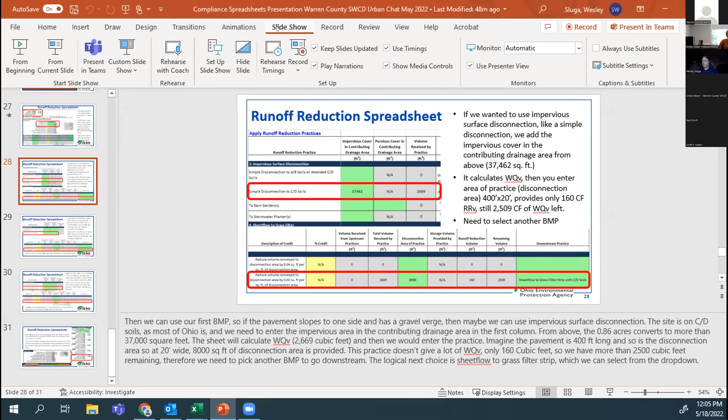I'm going to talk about the Ohio EPA compliance tools and spreadsheets that we've got available for anyone, external, that might be designers, engineers, developers, or our MS4 partners, to help. These worksheets are designed to help the review side of project compliance with our construction stormwater general permit, and they're not really design tools, they're much more compliance tools. I'll talk a little bit more about that in a minute.

One of our big pushes is that we've got a lot of different design guidance and requirements in our rainwater and land development manual, but it can be hard to piece all of that information out. So we put these tools together to have a concise location where you can check specific things to make sure your designs are all in compliance, or the designs submitted to you are compliant. It's a great way to facilitate communication between an engineering designer and the reviewer, which might be the MS4 in Warren County's case.

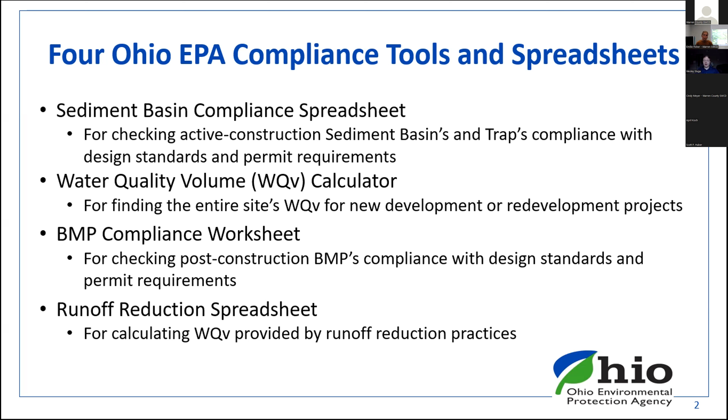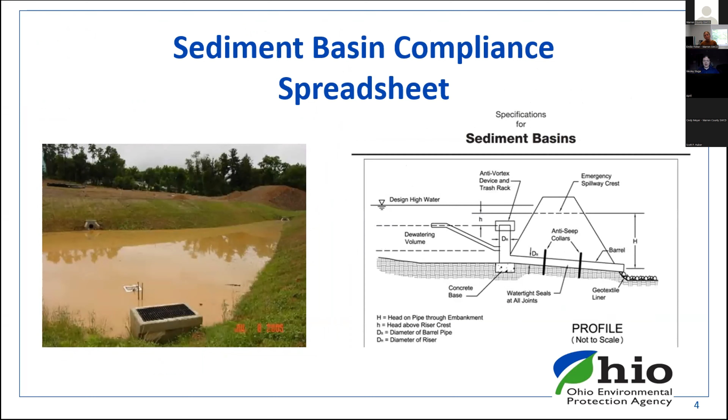The first one is a portion of the sediment basin sizing tool has to deal with skimmer selection and sizing, and most skimmers tend to be proprietary devices. So I want to clarify that the Ohio EPA doesn't require or recommend a specific type or brand of skimmer to be used. And simply because a skimmer is included in this tool is not an inherent endorsement or approval of that device.

Each skimmer needs to be designed specifically for the basin that it's being used for, because the outlet that's provided in the basin needs to meet the requirements of the permit. And that's pretty much to dewater from the surface at a required drawdown rate. And almost any skimmer can do that if designed properly.

I've also got some basic instructions. For example, we want one of these to be completed per basin. And then we want you to put it in the SWP3. So for each basin that you've got, you put one in the SWP3. Really, the only thing that needs to be put in is the basin sizing and dewatering tool tab. The introduction and regulatory guidance tab isn't going to provide a lot for a reviewer.

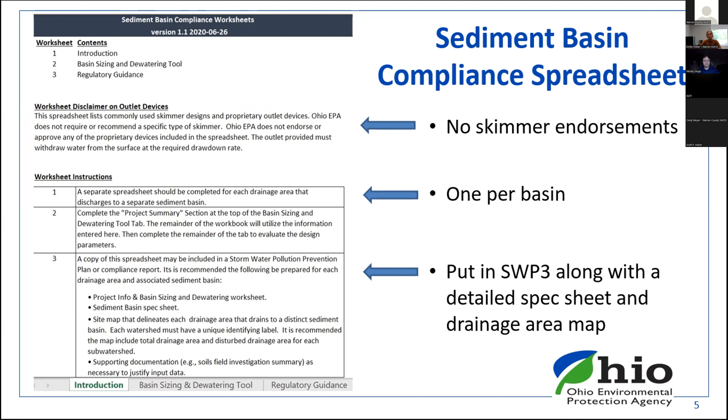Additionally, on the introduction tab, I'll keep reminding that these are compliance check tools to aid designers and reviewers. They're not a design tool, so they don't account for local peak discharge or flood control regulations or embankment design to ensure you've got a stable bank if you're using a basin or something.

So if you find something that is amiss, every one of these worksheets is going to have some contacts that you can reach out to. So you can see my name and my email there, as well as Justin Reinhart, the other engineer that I work with, his contact.

And then we've got a quick cell key that are color coded, and it's going to apply to all four of the tools that I cover today. The green cells are our data entry cells. So those are the only cells that are unlocked that the user can manipulate and interact with. All the other cells are locked to prevent editing or moving or kind of messing up the calculators.

Those yellow cells are constant value cells. For example, equation coefficients will be marked in yellow. While our gray cells are calculation cells, that's where our equations compute the different results based on the entries that you put into those green cells.

And then lastly, we've got our red hashed cells. And those are our design check cells. Those are going to indicate whether or not your inputs result in meeting the design criteria. And they're either going to display a great big okay or a not met. And that'll tell you if you need to go back and try something again, redesign it, or if you're good to move on.

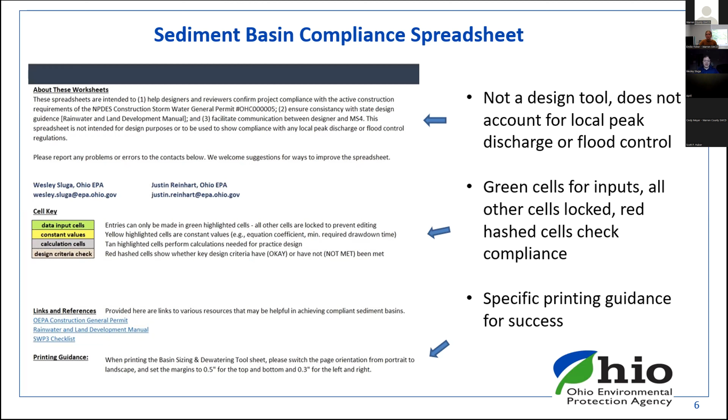And then lastly, at the bottom, we got some printing guidance. And this was an example of community feedback, which I really appreciated. The original format of the spreadsheet didn't really fit onto pages very nicely, but because I got some feedback on it, I was able to change the page orientation. You need to make it landscape mode. You restrict your margins, and this will neatly print off into a PDF, or you can print it off so that you can use it for your reviews.

Now, the basin sizing and dewatering tool tab, this is the bulk. This is where the action happens. And the first step is always going to be to fill out your project summary. I can't stress enough the importance of selecting the correct watershed and properly entering the total and disturbed areas for the drainage areas for these basins, because the rest of the spreadsheet is going to build off of that information. So you want to double check that you're starting out right, and you've calculated your drainage areas properly.

A drainage area is a product of land features and topography. It doesn't end at the site boundary. So you've always got to check for off-site run-on. And the watershed selection, I'll just note that's important because there's a special watershed in central Ohio, the Big Darby Creek, and it has special different volumetric requirements. But if you're anywhere outside of that watershed in the rest of the state, then you'll just use the standard statewide drop down.

Now you can see that on the right-hand side, there's strings of black text that extend to the right of many of the cells. This is guidance text, and it helps to indicate what format we might want entries in the green cells. It might give you an example of what calculation is being done in the gray cells, and then any requirements that are being checked in those red hashed cells.

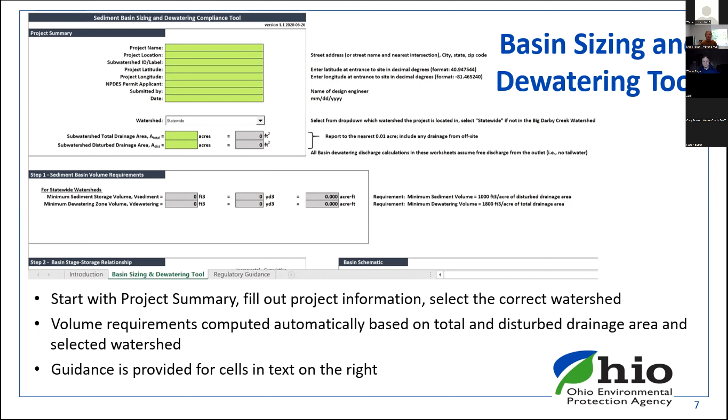So when you get into step 2, that is where your eyes might naturally be drawn over to our pretty awesome basin schematic that helps visualize the information that you provide in these steps. But the important part are step 2 and step 3, which is where you enter your stage storage table and your outlet elevations. I need to emphasize that it's vitally important that the exact skimmer outlet or stop elevations and secondary outlet elevations from step 3, those also need to appear in the stage storage table.

Because if they're not in there, then the spreadsheet isn't able to compute the provided volumes and is not going to give you that sought after okay in the compliance check cells. So if you're getting an NA or a not okay message, that's the first thing that you need to check, is to make sure that those elevations are replicated in the stage storage table.

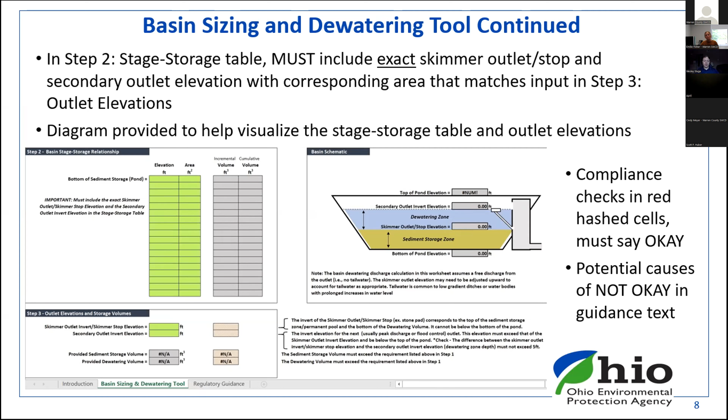But another example might be that your secondary outlet invert is so high that the depth of the dewatering zone, that's that blue section in the basin schematic, maybe that's more than 5 feet, and that is a maximum from our rainwater and land development manuals. That might be another reason why you might get the not okay readout.

Now, step 4 of the spreadsheet is the skimmer selection and sizing process. So the first thing is going to be to select which skimmer is going to be used. The options are listed there in alphabetical order. So if you, for example, select the Delaware DOT skimmer, then a built-in calculator is going to appear below, and I'll show you that on the next slide. But if another option is selected, like the ESC, the Faircloth, or the Marley float skimmers, then the spreadsheet is going to direct you to a link that takes you to the calculator that's provided by the manufacturer.

Now, I'll note that if you're checking or you're filling this information out, check whether you're using the required or provided dewatering volume when using those online manufacturer calculators. Some of them seem to suggest you should use the provided dewatering volume, but you really should be using the required dewatering volume.

And lastly, the last section is to input the orifice diameter size, and that's a little different than the skimmer size itself. So very often the calculator or the manufacturer calculators might spit out that you need a 4-inch X brand skimmer with a 3.2-inch diameter orifice. So this is where we want you to put that 3.2-inch diameter orifice, because that's the restricting or the control orifice, not the 4-inch skimmer pipe itself.

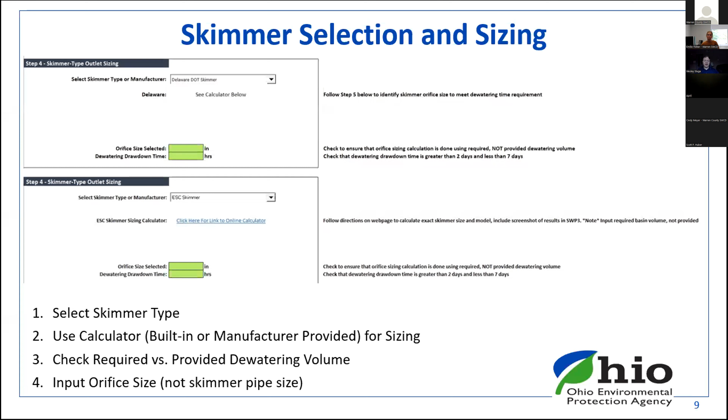Because the whole goal is to provide a dewatering time that is at least 48 hours, but not greater than 7 days. So that cell there is so that when you do your calculator, you can enter in the dewatering time that you've selected to make sure it fits in that requirement. Now, if you're using a skimmer that I didn't mention already or doesn't appear in the dropdown, we do have an other option, and then you can fill it out a little bit more manually.

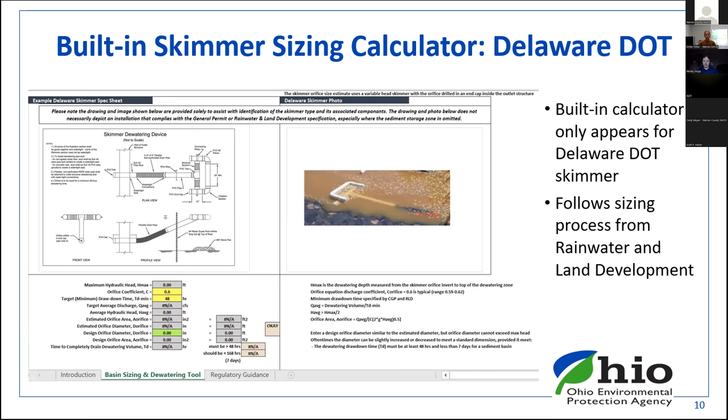After you've selected your proper skimmer type, you're going to see these boxes pop up. So this capture is unique to the Delaware skimmer, or the Delaware DOT skimmer, because it's the only one, as I said, that has a built-in sizing calculator. That's because this calculation method is relatively simple. It's just done using the variable head method. That means the constricting orifice is down at the outlet of the skimmer pipe instead of being up in the head of the skimmer. If it was up in the head, you would just use a constant head method. But that whole conversation is described in a lot better detail in the Rainwater and Land Development Manual, if you're curious how that works.

As I said, the other skimmer types don't have a built-in calculator, so you instead need to go to the manufacturer's calculator and do that sizing there. The dropdown is going to present the links to take you to those right tools, and so we recommend that you grab a screenshot of the calculator and include it in the SWP3 as proof that the size you selected is going to result in that desired drawdown that fits in that window.

And you can see that for each skimmer type, there's a detailed spec drawing that can be thrown right into the SWP3, and a photo for reference of what that skimmer is probably going to look like in the field. Again, if you pick the other option, you need to provide your own spec sheet yourself.

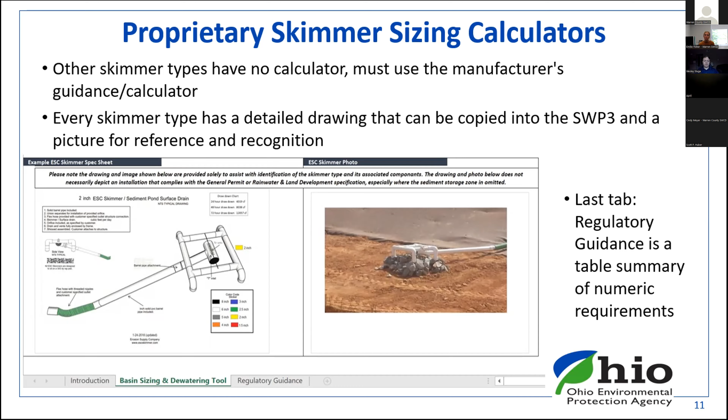I'll comment quickly that the regulatory guidance tab at the bottom is really just a table summary of all the numeric requirements that are specific to a sediment basin. That's already being checked when you fill out the tool completely. But sometimes people like to have just a list so they can go through a mental check to make sure all the major design conditions have been met. And that wraps up our sediment basin calculator.

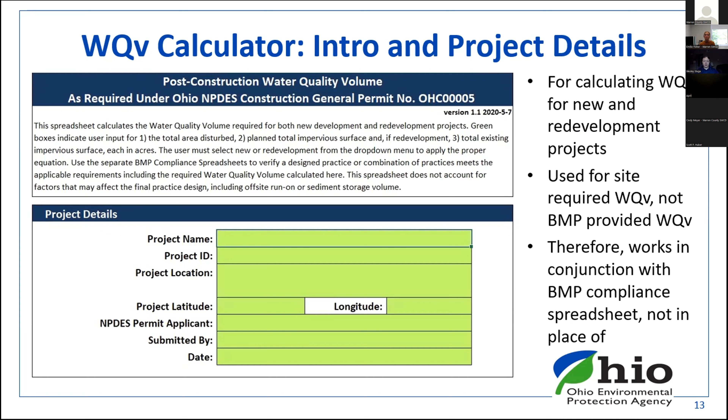So now let's get into our next one, and that is the water quality volume calculator. This tool is particularly helpful for calculating water quality volume for new development and redevelopment projects. It's not for the water quality volume for a BMP, it's instead required water quality volume for a site. So I make that distinction because this tool isn't a replacement for the BMP compliance spreadsheet. Instead, it's complementary. They work together really, really well. As always, we want you to start by entering general project details so that the tool can easily be associated with a specific project.

When you get that done, now we get to the useful part of this short calculator. If it's new development, you pick new development from the dropdown. That means the site wasn't previously developed. There's no existing impervious area that's going to be removed. So in this case, you only need to enter your total disturbed area, and that's usually identified on your plans by your limits of disturbance. It's also entered in the notice of intent. And then you'll enter in the proposed impervious surface area.

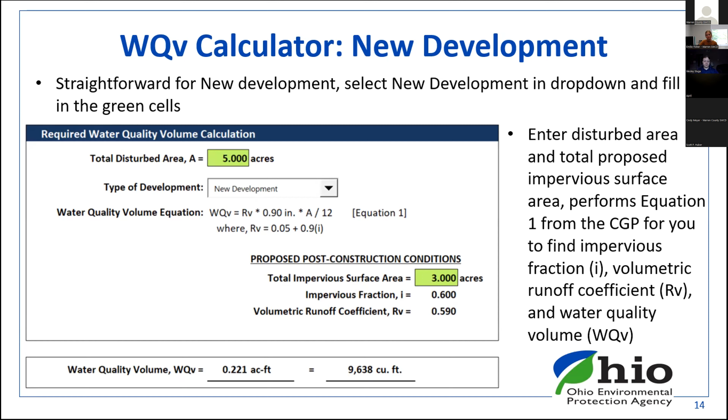Now, redevelopment is really similar, but it's important to understand how redevelopment works. On the next slide, I'll give you an example to clarify that, but we'll walk through the tool first. For now, I'll reinforce that you need to enter the disturbed area, disturbed being the emphasized word here, as well as existing and proposed impervious surface area that goes on within that disturbed area.

And we do that to kind of encourage the redevelopment of existing impervious area instead of a continued sprawl of new development.

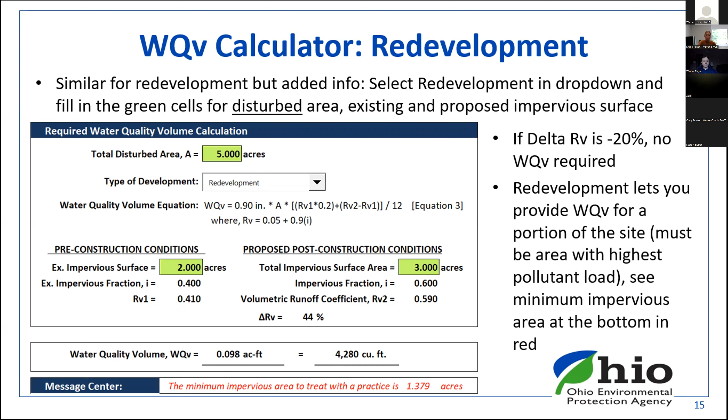So as promised, I wanted to make some clarifications on redevelopment because it was a little bit difficult for me to understand when I joined the agency. So I could understand if it might be a little confusing to you as well.

As I said, redevelopment is based on existing and proposed impervious areas within the disturbed area only. The reason I make that distinction is because everything that goes on inside the limits of disturbance might not always actually be disturbed. That's something that's kind of counterintuitive in plans. So let's say this parking lot for the shopping center is going to all be torn up and replaced all the way down to the subgrade. So it's going to need CGP coverage.

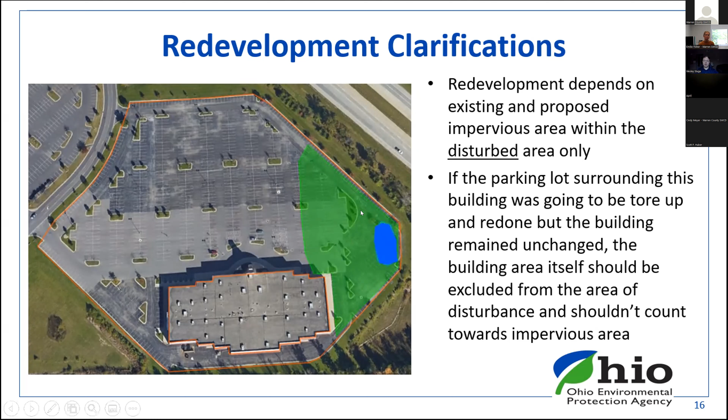Therefore, you're only going to use 4 acres for all 3 of those types if it's going to be totally impervious at the end. But maybe it's going to change and you'll have some stormwater basin off to the right, and maybe a grassy area. So because we use that redevelopment calculator, we could figure out what portion of the parking lot needs to drain to that basin, as we don't need the whole site to drain to that basin.

Now, that wraps up our water quality volume calculator, but we're going to get into our BMP compliance worksheet. This is our biggest and oldest tool, and it covers BMP compliance for each one of our different post-construction stormwater BMPs.

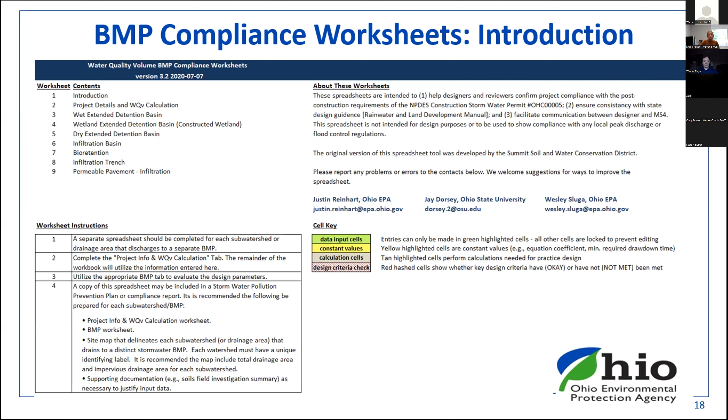This intro slide might appear really similar to that of the Sediment Basin Compliance tool. This was the original template for that other tool. It lists the different worksheets for each different BMP. It's got instructions. We want a separate spreadsheet for each BMP, and we want it to be included in the SWPPP. Again, we reinforce that this is a compliance tool, not a design tool. And then we've also got contact information and our cell keys again.

We'll start with our project info and water quality volume calculation tab. That's regardless of which BMP you're going to use eventually. So you enter your basic project details, your drainage area, and the impervious portion of the drainage area to that specific BMP. This tab will calculate the required water quality volume for the BMP given that drainage area.

This is probably going to be different than the water quality volume required for the site, which the water quality volume calculator prints out. That's usually because a site might have more than one BMP, or the BMP might have a slightly different drainage area than what the disturbed area was that we entered into the water quality volume calculator. Additionally, if you have a BMP on a redevelopment site that drains the whole site, you need to provide water quality volume based on the drainage area. So even though the water quality volume calculator might have said you could use a smaller impervious area, BMPs are all done based on drainage area. You have to physically manipulate the drainage area if you want to shrink the BMP.

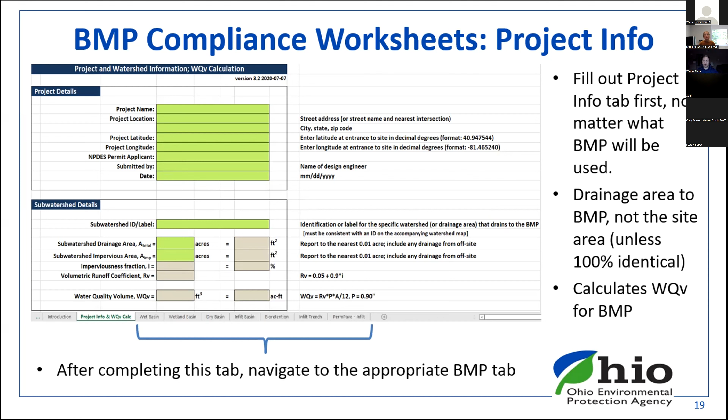So once you get data entered, you'll pick the appropriate BMP tab and continue. Now, the BMP that you've selected is an extended detention basin, kind of like our wet, dry, or constructed wetland basins. The tabs are pretty much the same. They are laid out the same and function almost identically. Our first big important step is step 3.

That's our stage storage table. We recommend using 1 foot or smaller contours, and that way the spreadsheet will accurately estimate your incremental and cumulative volumes that your basin provides.

Then in step 4, that's where you're going to enter your outlet elevations for your water quality orifice and your secondary outlets, as well as the volume of a forebay if there is one, like in a dry basin. You need both of those invert elevations because that's how you determine the amount of water quality volume that gets provided.

You need to review each of those design checks on the right-hand side to make sure that they all say okay, like in this example. But if they don't, you'll check out the guidance text on the right.

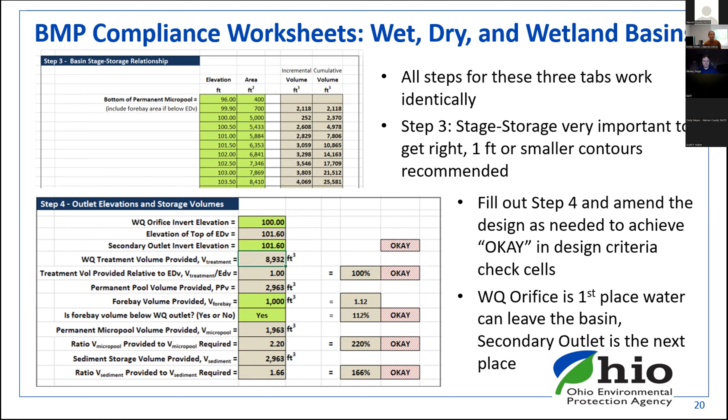Now, something that I will note in step 4 that can be a little bit confusing is that forebay volume. There's a drop down that asks if the forebay is above or below the water quality outlet. If it's obvious, if it's above or below, that's not really a big deal. But it's pretty common that, like in this example, it's both above and below the water quality outlet. I'll say it doesn't greatly impact performance of the basin, it's a pretty minor design detail.

The only thing it really affects is this permanent micropool volume provided. So if you do have a situation like this, you can always just manually determine the volume in the forebay and then subtract that out from the permanent micropool volume provided. Or you can just take the conservative approach, select yes, and make sure the design criteria still says okay. Then you can manipulate the size of the micropool as needed to make sure you get that okay.

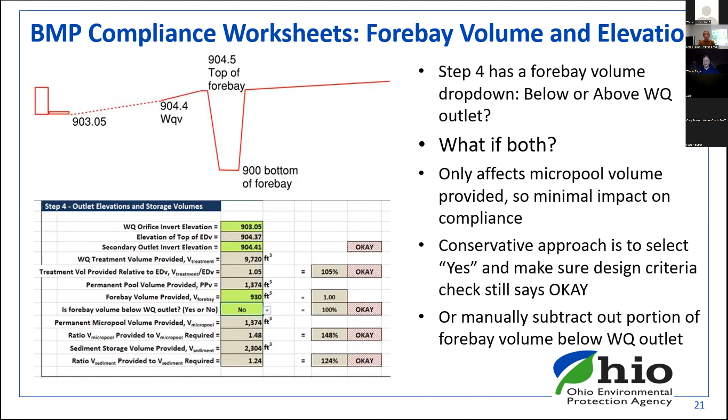Now, step 5 is where drawdown comes into play. The spreadsheet evaluates the outlet sizing for that water quality orifice. It's pretty neat, the spreadsheet actually gives a suggested orifice diameter, but we encourage you to alter it to fit a pretty standard size so that it's easier for the contractor to install. It might be difficult to install exactly a 1.49 inch diameter orifice. But really the big thing is as long as the outlet meets your drawdown requirements.

So in this example, it's for a dry basin that has a minimum 48-hour drawdown, but for wet basins or wetland basins, it's 24 hours. And then you've also got another component: you can't drain more than half of the water quality volume in the first third. That's what the second to last cell is checking there.

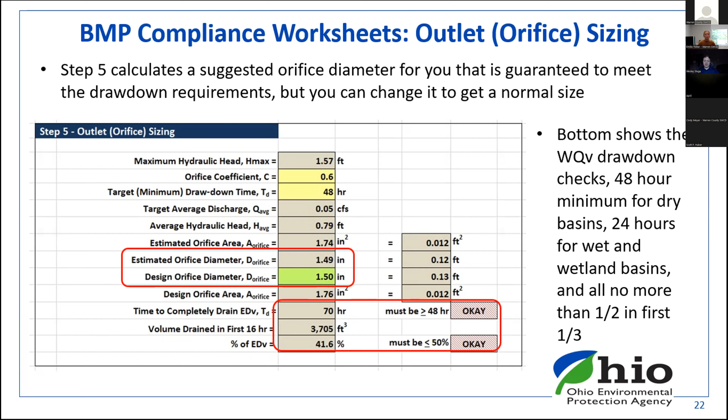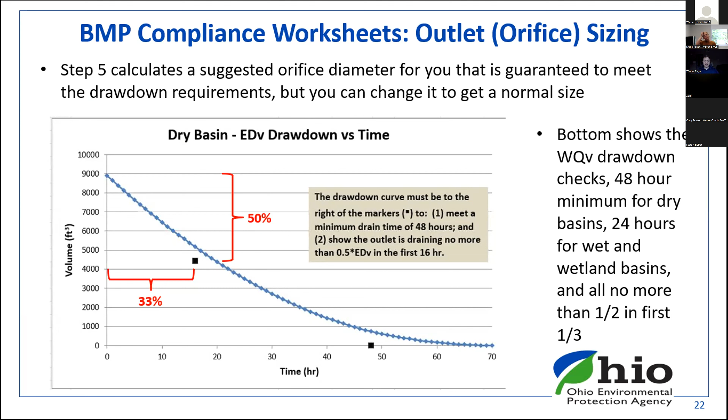I'll also note sometimes this calculator can suggest using a really small orifice, especially if the drainage area is really small. We don't recommend using water quality orifices smaller than an inch. Really, we don't suggest smaller than 2 inches, but definitely not smaller than an inch. They have a tendency to clog really easily, even if you're using a mid-pool draw or an upturned elbow to help protect the orifice. So that might be an indicator to consider altering some of your design parameters or adding additional protections to minimize your clogging risk.

Now, I'm not going to go through each one of the BMP tabs in quite as much detail as the 3 basins that I already covered, mainly because there's a lot of repetition. So I'll just try to focus on the important differences.

For infiltration basins and bioretention cells, there's this added component in step 2 that asks for filter bed area. You can see it calculates a minimum filter bed area there for you.

This is to ensure that the filter bed area isn't too small compared to the contributing impervious drainage area. When it gets less than 5%, we tend to see situations where you can overload and easily clog these infiltrative surfaces, and suddenly you turn these infiltrating practices into stagnant shallow ponds.

The stage storage table isn't shown because it functions the same from step 3, but at the bottom of step 3, there is something that's a little bit of a twist. The spreadsheet assumes that these practices are infiltrating, therefore they don't provide a water quality orifice. It only provides the overflow invert.

So this overflow invert does 2 things. First, it limits the ponding depth so that you can ensure you provide at least enough water quality volume, but also it's a check because certain vegetation doesn't tend to do well in deep, frequent inundations. So it's kind of a 2-step check there.

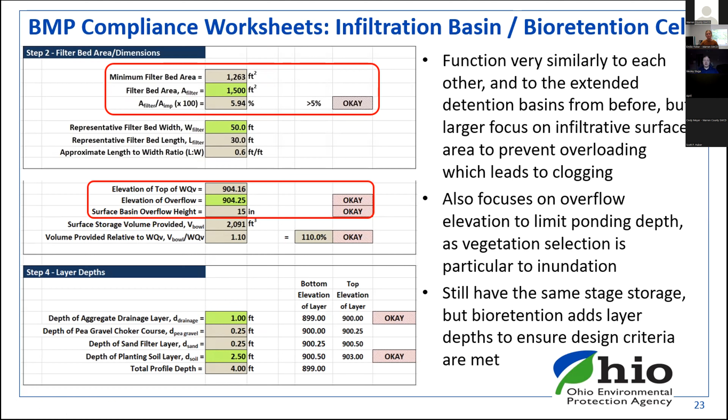So we'll wrap up the BMP compliance worksheet with infiltration trenches and permeable pavement. This also applies to bioretention and infiltration basins, so I'm kind of lumping them together a little bit here.

And that's section 1, soil suitability. So hydrologic soil group, texture, water table depth, underlying soil hydraulic conductivity - those all greatly determine the ability of a BMP to infiltrate stormwater. So if you've got clayey soils with low KFSs, they tend to be pretty poor infiltrators.

So if that is the case, that might be a time to reconsider which BMP you're using, because the existing soil might not support the intended use. We do recommend attaching a geotechnical report or document or any field measurements on how you documented KFS to ensure that things are going to meet the proof of concept.

Stage storage isn't a component for trenches or permeable pavements, but do remember that all infiltration BMPs, even the infiltrating bioretention cells, have a maximum drawdown of 48 hours, as opposed to a minimum drawdown that the extended detention practices have from before. This is a double check to ensure that constant ponding isn't going to be an issue.

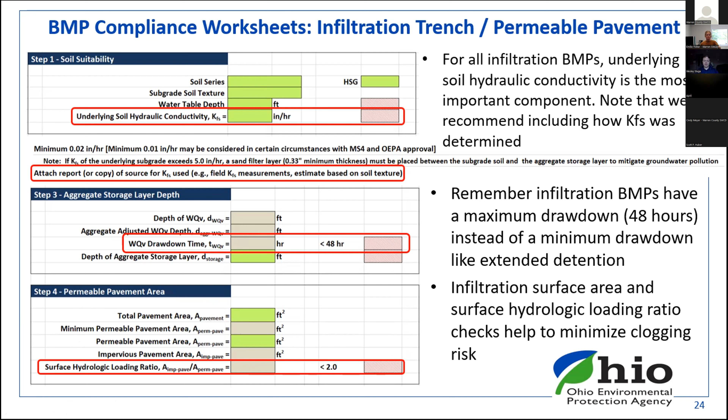And then that puts us into our last spreadsheet, runoff reduction, and that includes our BMPs like grass filter strips, downspout disconnections, and grass swales and some of our other BMPs.

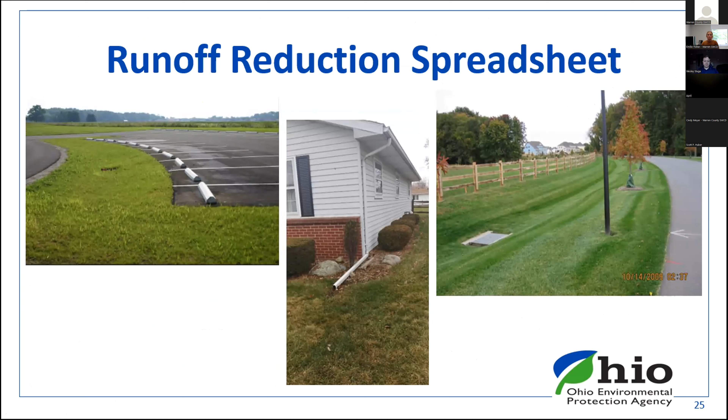Spreadsheet starts just like the others with a project info and summary tab. Green cells are editable, but there aren't any design check cells in this spreadsheet because it's more about providing water quality volume than it is about meeting design requirements.

And then another thing that's a little different is that the tabs at the bottom are different areas instead of different BMPs, because a single drainage area could have multiple different runoff reduction practices in series. I'll do an example to see a little bit of how that works and how this spreadsheet works.

We've also got down there in orange, an area unit converter. Most designers tend to work in acres, but because these runoff reduction practices tend to be pretty small, the spreadsheet uses square feet.

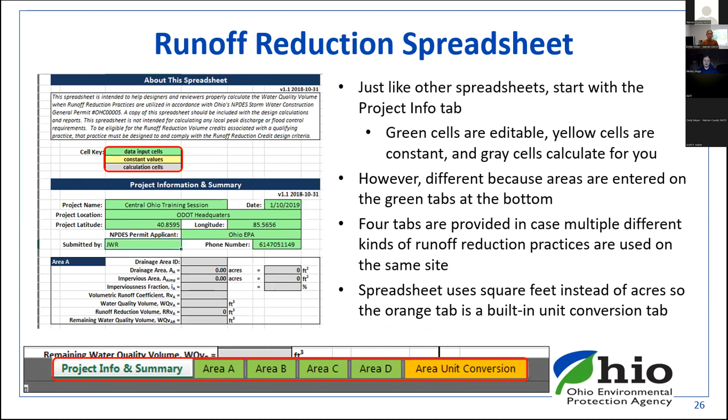Each tab, area A, B, C, and D, all look and function the same. I've got this zoomed out a lot so you can see what the whole thing looks like, but when you pull it up, it's going to be zoomed in so you can only see a couple runoff reduction practices that you'll have to scroll through if you want to see the others.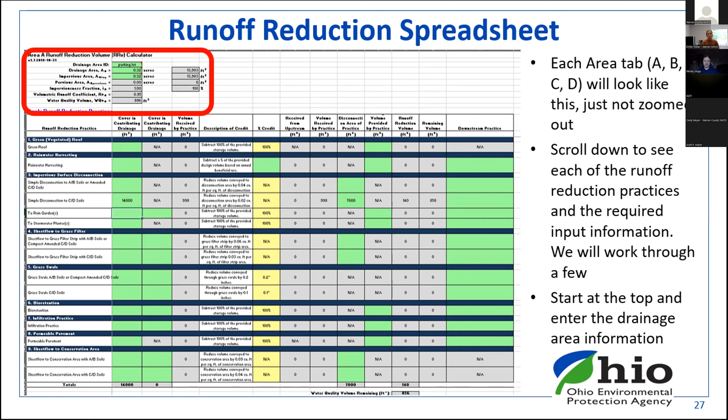So it's got all the practices listed here on the left, but you only need to enter information for the practices that you intend to use. So let's work through an example to see how this spreadsheet kind of works.

So imagine we've got a 0.86 acre parking lot, and we think we want to use runoff reduction to provide water quality treatment because we've got a pretty sizable vegetated area to one side that we think we can direct our drainage to. So we enter our ID label and the drainage area of the parking lot and what portion of that area is impervious.

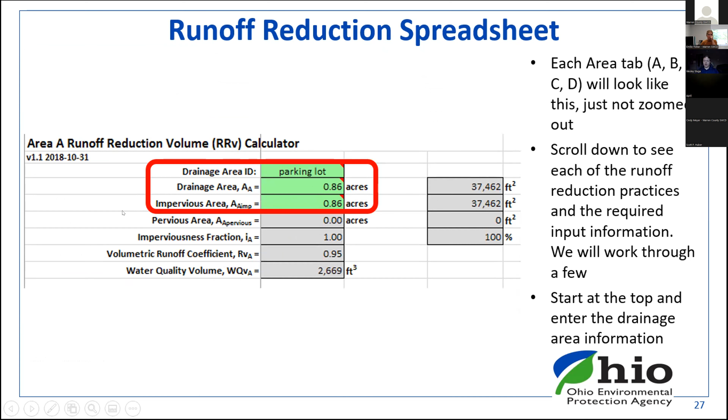And now we'll get to our first runoff reduction practice. So if the pavement has slopes to one side and we've got a gravel verge that we're planning on using, maybe our first natural instinct would be to use impervious surface disconnection and use the simple disconnection.

The site, for example, is on CD soils, as most of Ohio tends to be. And so therefore we enter the impervious area in the contributing drainage area column. So we would use that area converter tool to take 0.86 acres into just about 37,000 square feet. And then it's going to calculate the water quality volume that needs to be provided, 2,669 cubic feet.

And then we enter into the practice portion. So say we've got about a 400-foot long section of pavement, the disconnection length, and this first disconnection area is going to be about 20 feet wide. So it's 8,000 square feet of simple disconnection. We can see that it doesn't provide a lot of runoff reduction volume, only 160 cubic feet. So it doesn't take much of a dent out of our remaining volume. So therefore, we're going to need to use another BMP downstream.

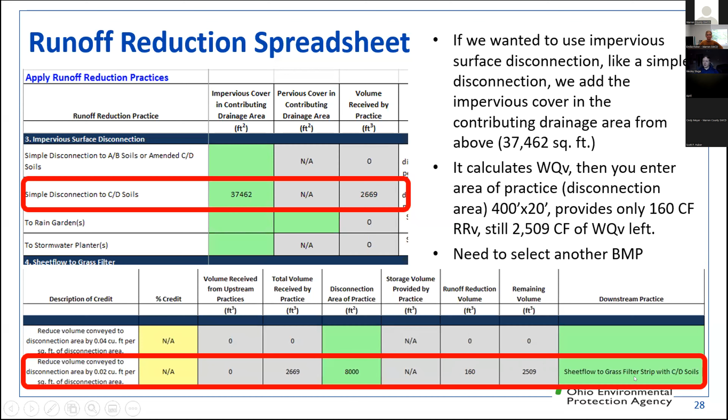And the logical next choice is to do sheet flow to a grass filter strip. So we would select that from the drop down, and then we would scroll down and find that practice. Because we already added values into these two columns, they're already factored in from before. There's no new contributing drainage area. So then we would figure out the disconnection area or the area of the practice.

Say maybe we've got 50 feet wide, so we've got 20,000 square feet of grass filter strip. It's a little bit bigger, 600 cubic feet, but we've still got more than 1,900 cubic feet of water quality volume left. So we're going to need another BMP after that.

Luckily, we've got lots of pervious surface. So the only option after these two is conservation area. That's the last in line. Nothing can drain from a conservation area.

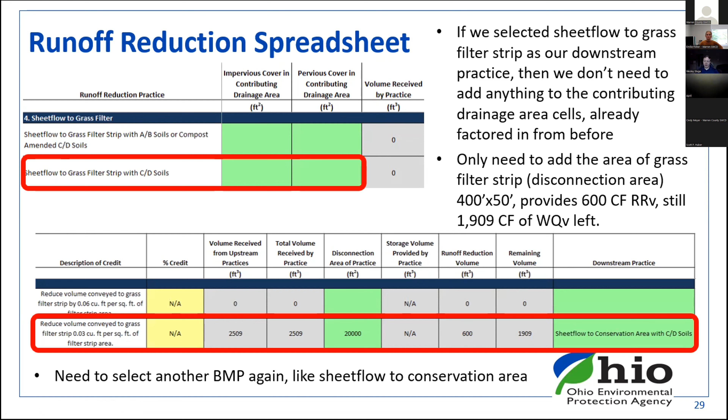So again, we don't need to add anything into the first part. We can skip right to disconnection area. And we've got a big undisturbed conservation area of trees and meadow grasses. It's 100 feet wide, so that gives us 40,000 square feet, and that's a pretty good chunk. That's 1,600 cubic feet of runoff reduction volume. We still got a little bit left over, just about 300 cubic feet remaining.

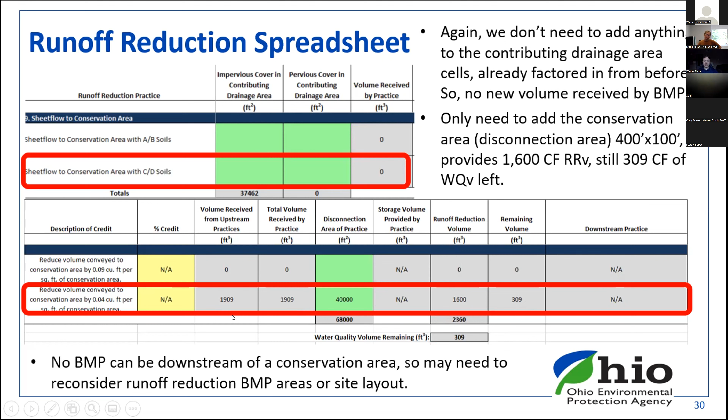So there's no more downstream practices that we can use. So we might need to reevaluate the layout, the different proportions. Maybe we could use less simple disconnection area and increase the conservation area to try and meet that full requirement. Or maybe we need to consider using a structural or traditional water quality practice, or BMP.

And after you fill out that tab, you're going to go back to your summary tab, and you can see all the information for each one of the different areas all in one nice, neat place. It's going to show your drainage area, impervious fractions, water quality volume that was required, how much you provided in runoff reduction volume, and then what you've got left over. And then you've got that down at the bottom in project totals. You can see it for all the different areas combined.

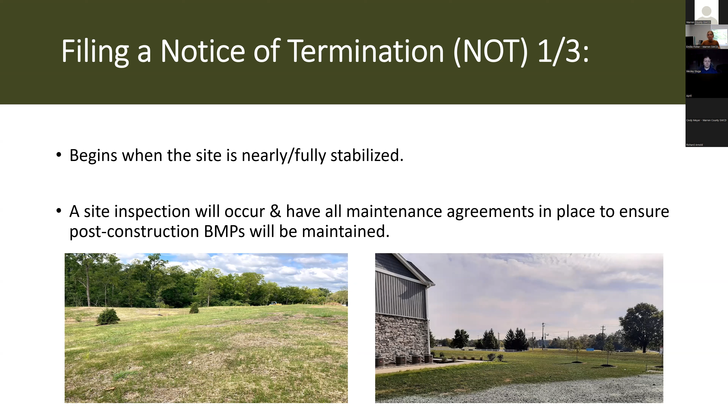And here are just some pictures throughout the county that we've taken. So the picture on the left would be a good example of a site that's nearly stabilized. There is some vegetation growing, but there still are some bare spots. Picture on the right would be a fully stabilized site, and that would be ready to go and file for the NOT if it hasn't already.

So when you go to file the NOT, there is a new website through the Ohio EPA, and it is on the Streams portal. The link is right there in blue. When you log into Streams, you should see a screen kind of like the cutout I have there on the bottom. If your construction project is listed, then you can just click on it to access the permit.

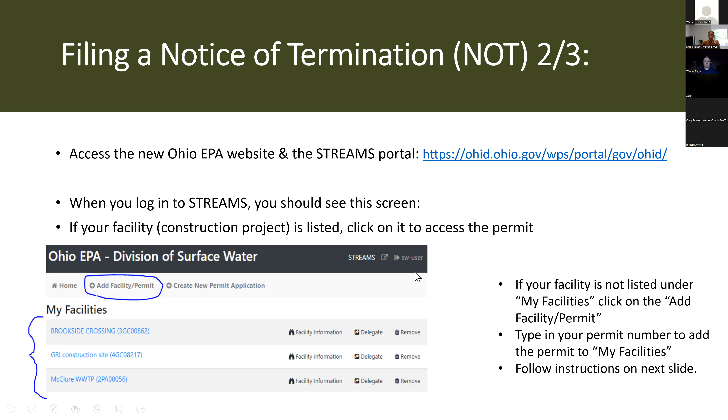Sometimes the facility, which is what it's called on the website, or your construction project isn't listed. Then you will have to click add the facility or the permit.

Again, if your facility was not listed under the facilities, you can click on Add Facility Permit and then type in your permit number to add it to My Facilities. Then just follow the instructions I went through: click the arrow for the drop down, go to Actions, the blue button, and select Terminate.